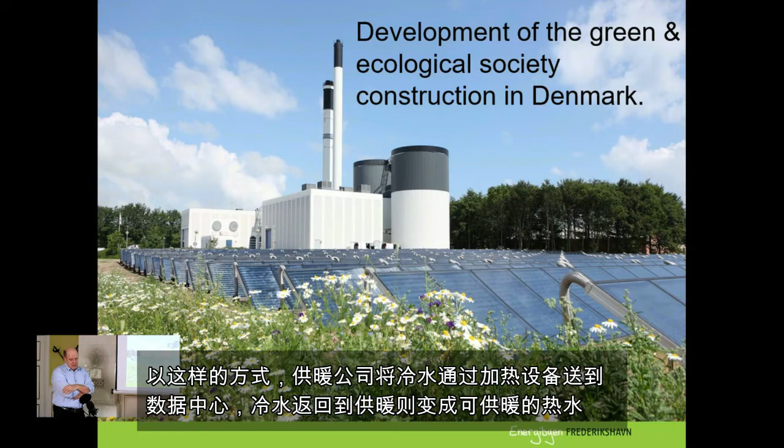Just to show you where we are actually located: we are in the northern part of Europe, also what we call Scandinavia, and in Denmark we are in the northern part of Jutland. You see our municipality from north to south, about 100 kilometers, and we have a number of inhabitants of 60,000 people. Most of them are living in single houses, and a third of them live in rural areas, while two thirds live in the towns.

Two thirds of the houses are heated by district heating, and that's very common in Denmark, to have district heating instead of single heating houses.

The Danish government has focused on two things: a medium-term and a long-term goal. One of the strategies is focusing on 2030, and that's a quite new strategy which came last year in 2019. Then we have the long-term goal of 2050, where they want to make this CO2 reduction 100%. The Danish government wants to reduce CO2 emissions by 70% by 2030.

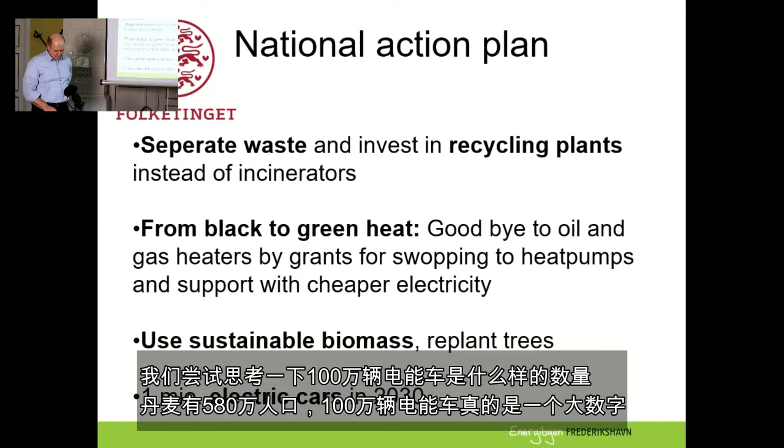Afterwards I will show you in practice what we have been doing to prevent that from happening in the future.

And of course this is a big problem for the people living here. Not economical, because they all have private insurance, so everybody living there had to move out from their houses for half a year to dry them up and restore them. The insurance was paying them, so it was not an economical catastrophe, but for the families, they were without homes for 6 months.

It was not a pleasant adventure. But today the problem is solved. The thing that is happening in our area is that there is coming more and more rain, and more heavy rain, and we have to solve that so we can get rid of the water, so that we don't have this flooding.

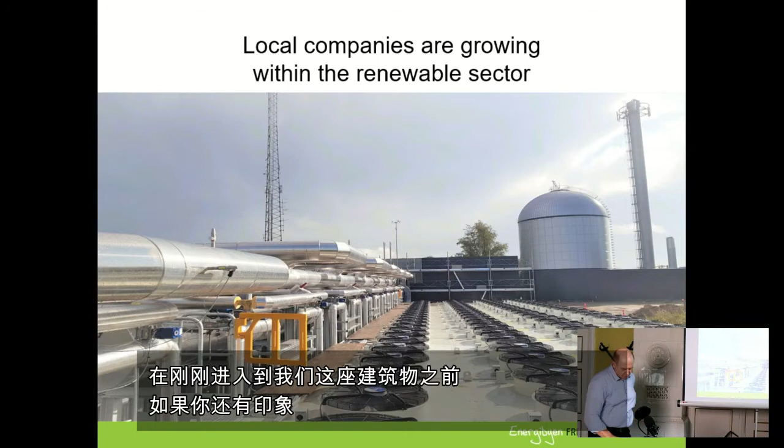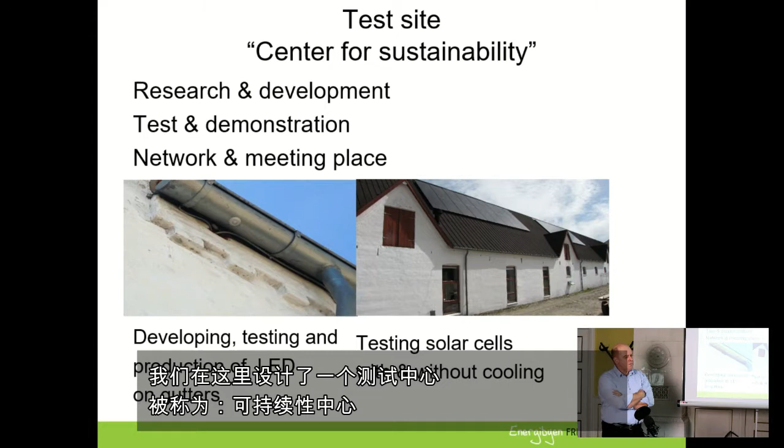At the place we are doing this movie, it's called Knivholt Hovedgård. We have a small test site, we call it Center for Sustainability, and here companies can come and do research and development, and they can do tests and demonstration, network, and meet with other companies.

These two pictures show what they are actually testing. For example, one local company is testing small LEDs on gutters, so they could light up the buildings with beautiful old architecture. Another company is testing solar cells with or without cooling. And companies are always testing smaller things here to develop new products or make their products better.

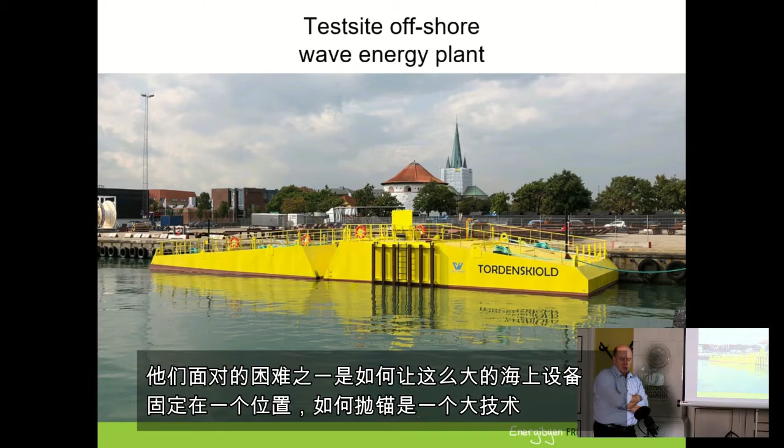This is another thing we are testing at the moment. We also have an offshore test site for wave energy plants. This wave energy plant produces electricity from the waves using two pontoons connected together - when they move, it produces electricity. At the moment it's being tested just outside, 4 kilometers outside the harbor where we are staying, and it's actually producing quite a lot of electricity. One of the efforts has been how to anchor such a plant when the wind shifts and it has to turn around, but we're getting very good results at the moment. In a way it's a very primitive machine, but when you're on the ocean you have to make simple solutions because of the strong weather.

This is another thing which is coming. In the last two years, we have been raising up a test site for offshore wind. We want to be a test site for the second generation of offshore wind turbines, and what they would like to test is different things. They want to test whether we can assemble the whole wind turbine at the harbor and then tow it out to where it's going to be placed. It would be much cheaper if you can assemble it at the harbor instead of doing it offshore.

Another thing they are testing is the size of the wind turbines. Normally a Danish wind turbine, from Siemens or Vestas for example, would be about 10 megawatts. I think in the future they will grow to 15 megawatts or so, and they have to test how we can raise structures that grow so fast and so high - I think it will be approximately 275 meters, which is much more than the normal offshore wind turbines we have today. So it's very interesting but also important to have it close to a harbor, so you can experiment with things close to land.

The way we have been making our roadmap for the future has been, until now, through a strategic energy plan. From next year we will use a climate plan instead, but it has still been our way to stay on the road - to have this energy plan, but also action plans for different things: how can we do this transformation? Every year we have done an evaluation, which we discuss with our local politicians - how is it going, and why was this going, or why was this not going?

The whole implementation, going from black to green energy in our municipality, would cost approximately 1 billion euros, and it has to be financed mainly by private investments. What we have seen is that this could create 7,000 new jobs, which is quite a lot compared to the only 60,000 people living in our municipality. So that's the main reason why we are focusing so much on the transformation - that we can create jobs for the future.

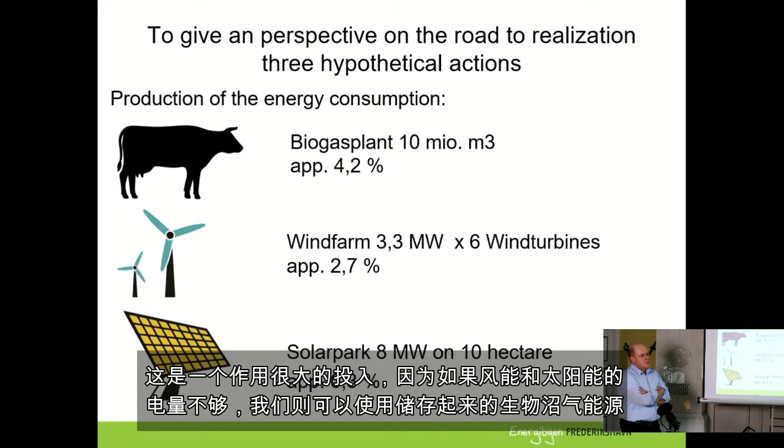And in Denmark we have a national grid with gas, and that's very good because we have storage possibilities with the natural gas, which means that if there's no electricity from wind or solar panels, then you can use the biogas from the storage in the national grid.

I will now show you an example from the district heating, how that would be working. It's working in a lot of different ways. At the moment we have a company called Man Energy Solution. They are testing engines for ships, and for many years this testing has been producing a lot of hot water when they were testing the engines, but they had to cool it down and were paying money to cool it down.

Instead, they made a partnership with the local district heating company, and that means all the heat from the testing is now going to heat up houses in the town called Frederikshavn, which we are staying in now. That's a good solution for these partnerships, to say: what is waste for one company can be positive and a good solution for another company.

The waste trucks you see there are actually driving on upgraded biogas, and that's another way. They're also burning the waste, so it produces approximately 30% of the heat in the town today by burning waste.

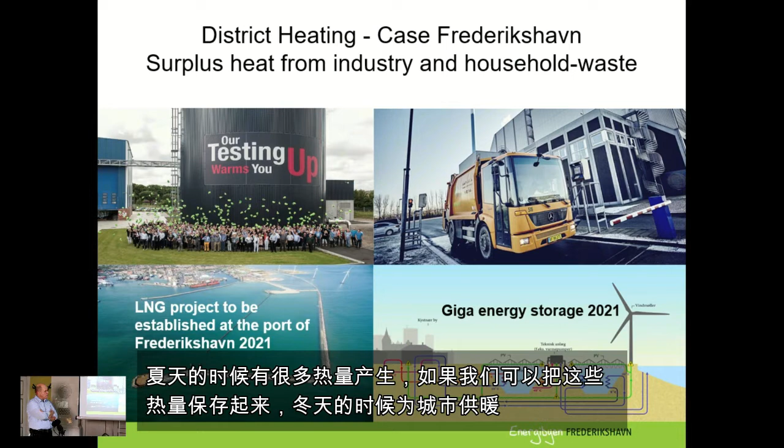And when this LNG is produced, the compression of the gas will produce a lot of heat, and that heat you can use again to heat up the town when you have the district heating company. And therefore they are also talking about how can we make a giga energy storage, because in the summertime you are not using very much heat, but if you can store it for the winter time, it could be a very nice way of nearly heating up a town like this for free.

Well, let's look at biogas and transport. The good thing about establishing a biogas plant is that we have a lot of stuff from animals that isn't used with a lot of gas, and when you have the national gas grid, you can upgrade the gas and put it into the grid. The price will be approximately 30 million euro.

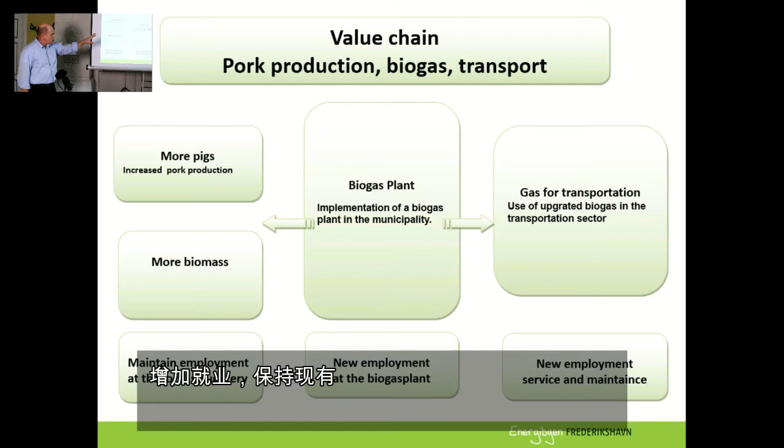And produce more biomass, and then you can maintain the employment at the local slaughtery. If there's no pigs, there's no slaughtery, and the slaughtery at the moment has 1,000 people working there. So it's important to keep these jobs too. That's the way we think when planning and thinking how to develop this municipality. It's important to think of it as a value chain, so create new jobs, keep the existing jobs, and always think about how to get more out of it.

This is what my colleague Jesper will show you. It's converting organic waste to green energy - when you are picking up household waste, you can turn it into biogas. And this company is actually also a private investment.

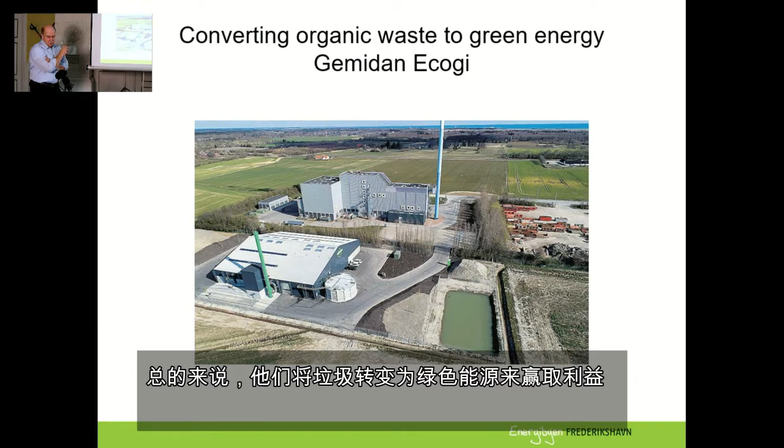Jesper will show you a short video about the company, so I won't go into it. But again, what has been waste until now is actually converted into green money.

Another example is what we have been doing with the transport sector. Some buses are driving on biogas, some waste trucks are driving on upgraded biogas, some municipal cars are driving on upgraded biogas, and also some of the city buses. I think this is also slowly making a change, but I think in the future it will not only be biogas driven cars and trucks - it will more be that private cars are mainly driven by electricity.

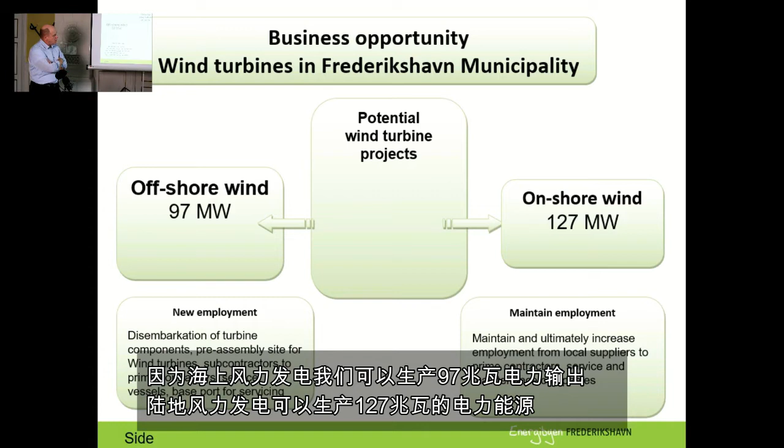When we talk about wind turbines, we have quite a lot of potential here - offshore we can produce 97 megawatt wind, and onshore 127. That's quite a lot actually. And if it was possible to put up all those wind turbines, we would have done the transformation to 100% renewable.

But at the moment, it's not very popular with the population to put up wind turbines onshore. So it's not easy to be a politician if the whole local public sector is against it. But still, it gives us a possibility to create a lot of new employment and of course also maintain the existing jobs. There's a lot of jobs in this.

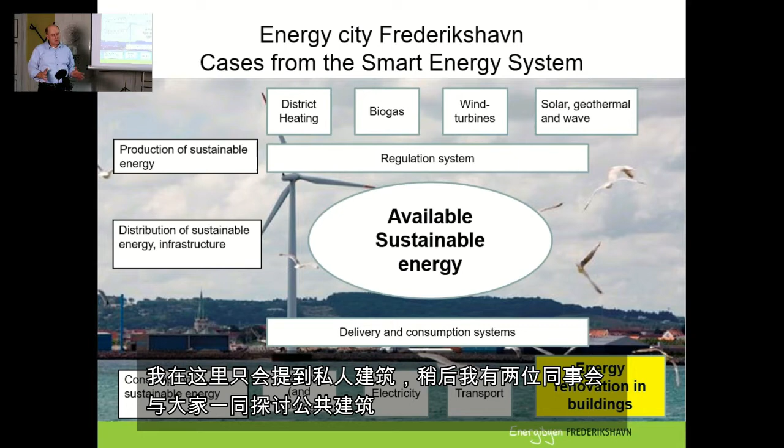A little bit about energy renovation in buildings and what we've been doing. I will mainly speak about private buildings, because my colleagues will afterwards tell you about how we work with public buildings.

Just to show you, in a few years the energy consumption of a new building has been reduced. From 2008, it was legal for a house to use 70 kilowatts per square meter per year. Now, 12 years later, it's been reduced to 17 kilowatts per square meter per year. That's quite a reduction, so new buildings aren't a problem in our area because they nearly don't use any energy.

But remember, we only put up 1% new buildings per year, so it would take a lot of years before the old buildings are swapped out or broken down.

What we try to do is motivate local citizens to do energy renovation, in different ways. We've made a magazine which says if you put insulation on your roof, you actually earn money in a few years because the temperature will rise and you won't use as much energy as normal.

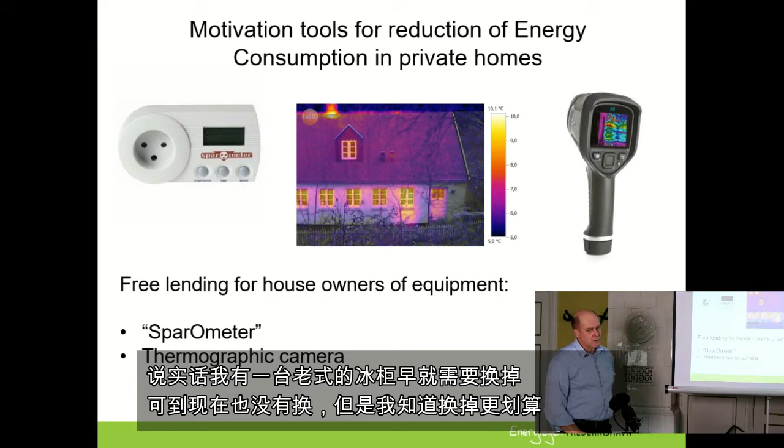Another thing we've had success with is an offer from the local energy company that people can have energy counseling for free.

This man visits house owners for one hour, and afterwards makes a report on the possibilities for the building to save money and do energy renovation. Over the last 10 years he's visited 5,000 private houses in our municipality, and remember, we only have 60,000 inhabitants. That means he's visited quite a lot of the buildings in our municipality.

The last thing I'll mention is that we try to motivate local citizens toward this green transformation. Two years ago we created the first youth climate council in Denmark. These young people are not like Greta Thunberg from Sweden, who protests against what adults have been doing wrong for years. Instead of protesting, they say: we are going to show you how you can make a change for the future that is better for the climate.

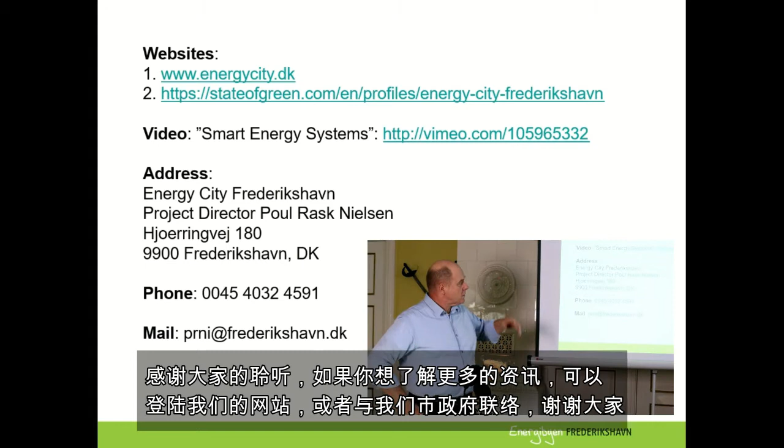My name is Jesper Christensen. My presentation deals with waste management and waste planning in Frederikshavn Municipality, with focus on how we collect and treat municipal waste from households. My background is 30 years of environmental work in Denmark, primarily in Frederikshavn Municipality and in a waste management company. Today I deal with waste management, wastewater planning and casework in relation to industry.

The purpose of this presentation is to look at the solution we have chosen in Frederikshavn Municipality regarding waste handling and municipal solid waste and municipal food waste. And finally, I will give you some thoughts about the future and new upcoming legislation.

First, I want to start the presentation with a single slide that shows why it is important to handle waste in a sustainable way. Next, I will give you a short view of the planning process in Denmark and in the municipality, followed by a presentation of the different collection systems and the various treatment plants we have in Frederikshavn. Finally, a brief presentation of possibly new initiatives in the future.

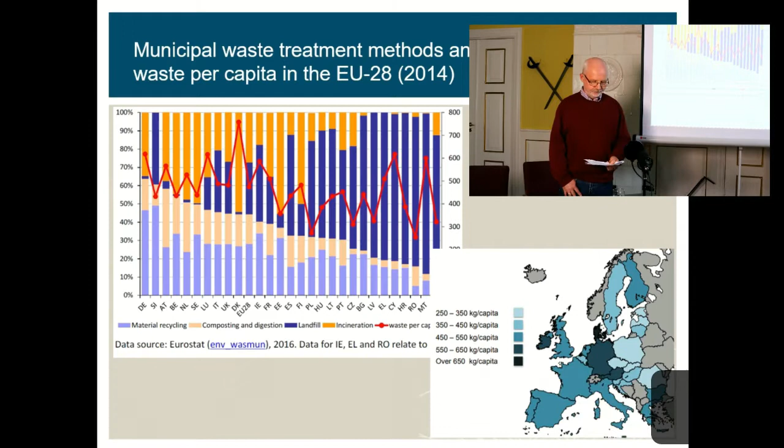In Denmark, the municipality has the responsibility to make a plan for handling waste. The plan is based on European and Danish legislation. The Danish environmental legislation states that municipalities have to prepare a waste plan which covers a period of years. In this case, we have made a plan spanning 10 years.

The plan contains and is based on 3 pillars: the mapping, where waste resources in the municipality are mapped, and a target and planning section for the upcoming years. The plan covers 60,000 tons of waste per year.

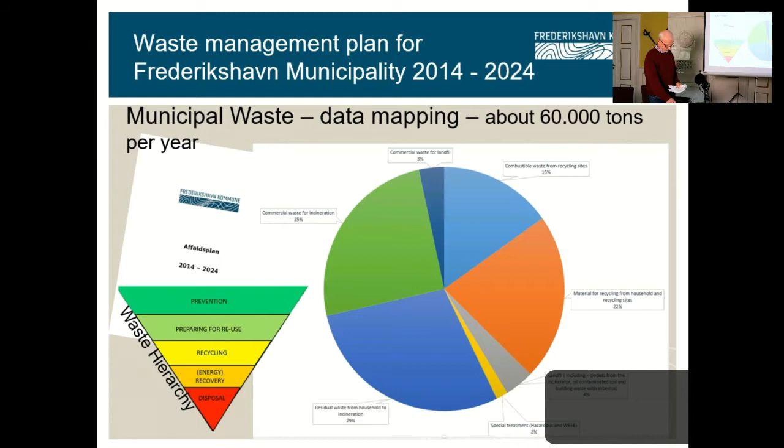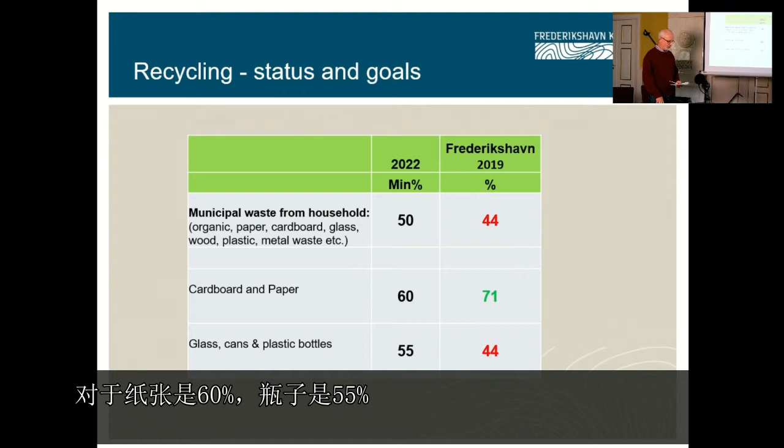That table on the slide shows the recycling percentage that Frederikshavn Municipality must achieve before 2022. It is the municipality's goal to meet the current national targets by 2022. The overall goal for recycling household waste is 50%. For paper it is 60%, and for bottles it's 55%.

The current recycling percent is only 44%, so we still have a way to go. The collection of food waste has increased the recycling rate for municipal waste in general, but we still have a gap before we meet the goal. National targets for recycling are increasing, and new legislation is in draft and is expected to come into force in 2021.

Frederikshavn Municipality handles municipal waste through the collection of domestic waste and through a number of recycling arrangements. The collected waste is treated for recycling and composting, and that means mainly garden and park waste. Food waste is pre-treated for use in a biogas plant. Residual waste that cannot be recycled goes to an incinerator plant with district heat facility, and finally we have a small amount of waste going to landfill.

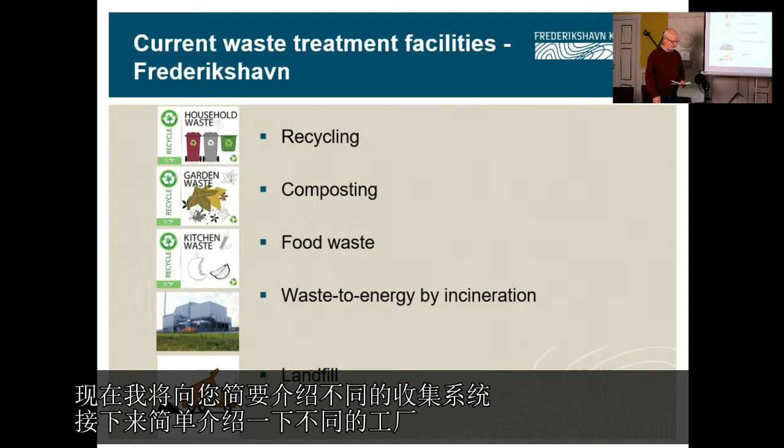I will now give you a brief overview of the different collection systems, and next a brief description of the different plants.

We have here a picture of the collection system we use today. Every family living in villas, townhouses or country houses must sort waste in a number of fractions in containers provided by the municipality. Apartment houses have a system similar to the self-delivery system with some extra containers.

First of all, household waste from the kitchen should be divided into two fractions: residual waste and food waste. Food waste contains energy and minerals, especially phosphor, a limited resource important to get back onto farmland. Second, every house has a container for paper for recycling, and finally discharged batteries for separate treatment as hazardous waste.

As previously mentioned, national targets for recycling are increasing, and we expect new guidelines coming into force in 2021. One of the proposed changes is increased collection by the household with up to 10 different recycling fractions. We are considering future options, but are still waiting for the final legislation.

Frederikshavn Municipality has established a number of centrally located collection containers which citizens can use for the disposal of glass bottles, plastic bottles and metal cans. They collected around 450 tons of paper and cardboard in containers. Together with paper and cardboard from the household collection system, it gives a collected volume of about 2,200 tons in 2017. The amount has been slightly declining in the last year due to less printed advertisement and newspapers and more use of electronic media.

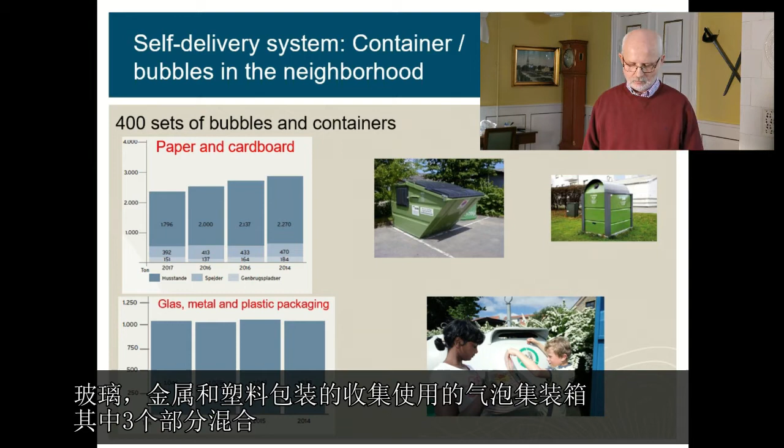The collection of glass, metal and plastic packaging takes place in bubbles where the three fractions are mixed. Analysis of the content of the bubbles has shown that people have a high ability to sort correctly when it comes to glass. Unfortunately, the collected amount of plastic and metal packaging is very limited in the arrangement, something we will focus on in the upcoming future and in upcoming new legislation.

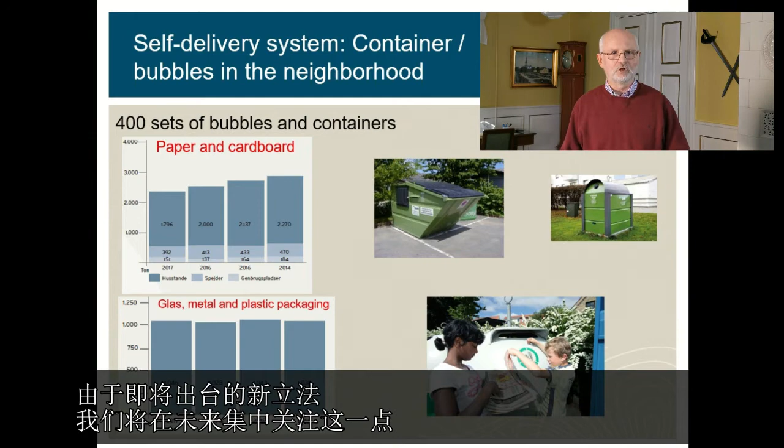The larger sites with expanded opening hours can provide greater options to separate the waste into several different waste fractions. Around 35,000 tons of waste is collected through the municipality recycling arrangement. The total volume has been stable in recent years with variations in the different fractions. The 4 largest sites collect 75% of the total volume.

One of the challenges in the last year has been to ensure the purity of incoming construction waste, so that the material does not contain problematic fractions such as electric components, PCB, heavy metal from paint, etc. Something to focus on in the future. More collection by the household due to new legislation can mean closing down the smallest recycling sites, but nothing is yet decided.

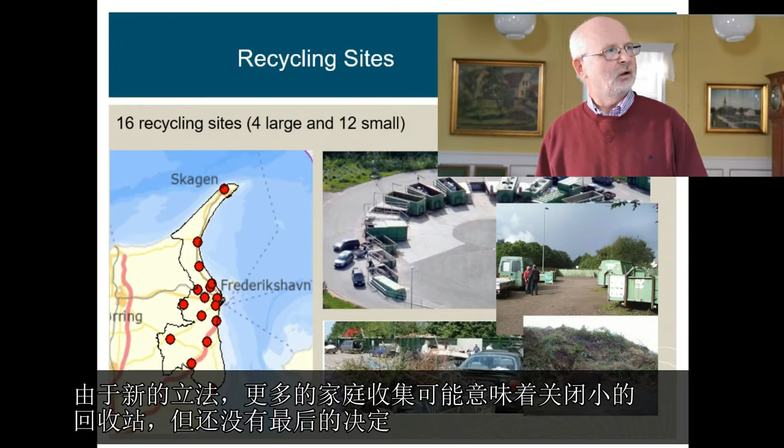There is one operating landfill in Frederikshavn. The plant was established 7 years ago. In 2009, the plant received approval to expand, and the expansion has a capacity of approximately 70,000 tons of mixed waste.

The previous existing area of the landfill is closed down, as you can see on the picture. A part of the closed area is used for recycling of construction waste, cinder from incineration and garden waste, oil-contaminated soil, building waste with asbestos and other fractions for special treatment. One of the biggest recycling facilities is also located on the site, as you can see.

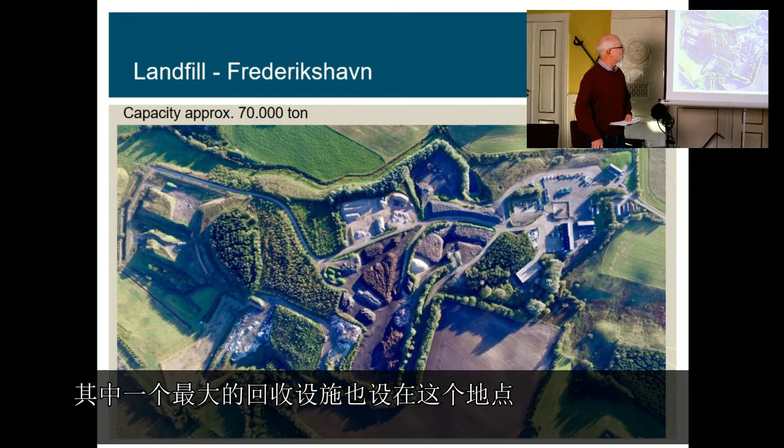Residual waste for burning from households is treated at the incinerator located in Frederikshavn. Residual waste from the recycling site is also treated at the incineration plant, as well as industrial and commercial waste. A total of approximately 35,000 tons of waste is incinerated at the plant per year.

More recycling means less waste for incineration, and a consequence could be that the plant has to be closed down. A national committee is working on a mapping of the total combustion capacity in Denmark. The result of the work may also mean that our plant in Frederikshavn will have to close during a period of the next 10 years.

In April 2019, Gemidan, a private company, opened a new plant for pre-treatment of organic waste in Frederikshavn. The plant is located next to the incineration plant, as you can see in the picture. Frederikshavn Municipality has made a contract with the company to handle food waste, a deal other municipalities in the area have also made.

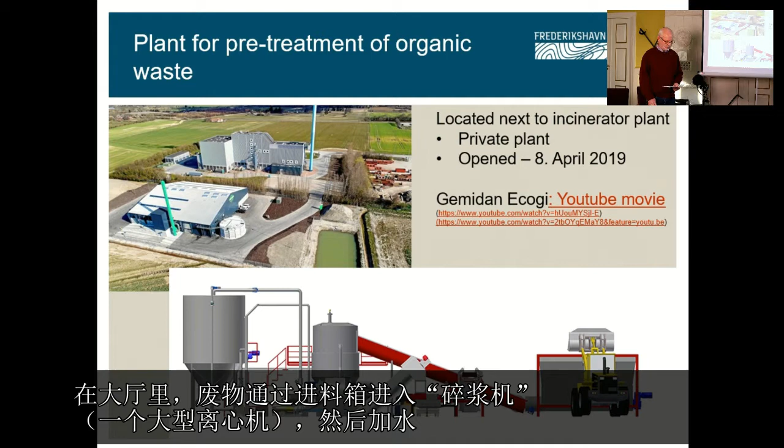The process: when the garbage truck has delivered the residual waste at the incinerating plant, it continues to the pre-treatment plant. In the hall, the waste comes through a feeder box into the pulper, a large centrifuge, and water is added in the process. Gemidan mainly uses water collected from the roof and roadways, as you can see beside the plant.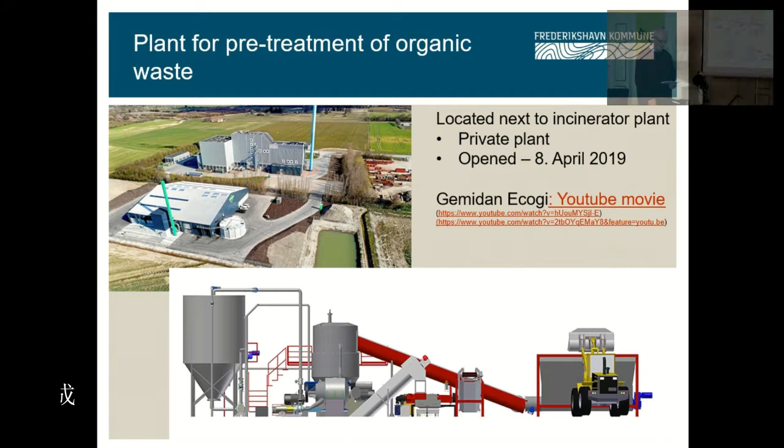During the pulping, the organic material is dissolved in the water fraction as a paste of biopulp. After the pulping process, the biopulp must be separated from plastic and other foreign elements, which happens by passing the pulp through a separator. The finished pulp is stored in a big tank, and plastic and foreign elements are sent to the incinerator.

We will now see a video of how the whole process works in the plant.

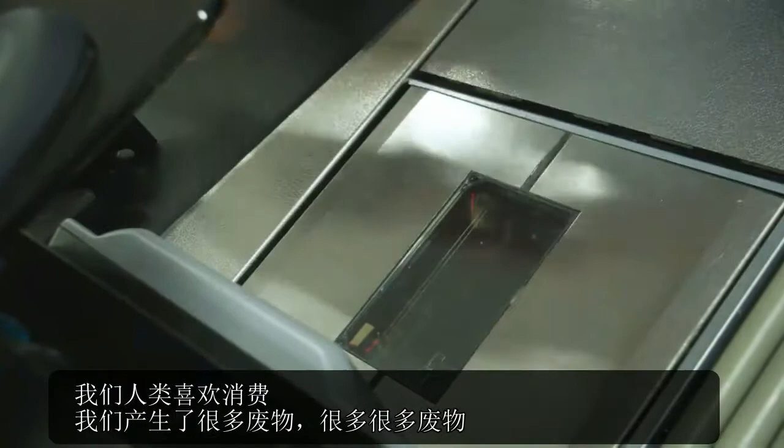We humans love to consume, and we generate lots of waste—lots and lots of waste. In fact, each one of us discards about half a kilo of waste in the dustbin every single day. This adds up to more than 200 kilos of waste a year.

The climate is changing all over the world. Temperatures are rising because the emission of greenhouse gases generated by human consumption of oil, coal and gas is out of control. But imagine if we could change this, if we could make better use of organic waste in the future by using it to fuel vehicles, for instance. Or if we could use banana peels, coffee grounds and other foods thrown into the dustbin to fertilize farmland instead of just incinerating all this waste.

This is by no means a futuristic scenario. In fact, it's already happening.

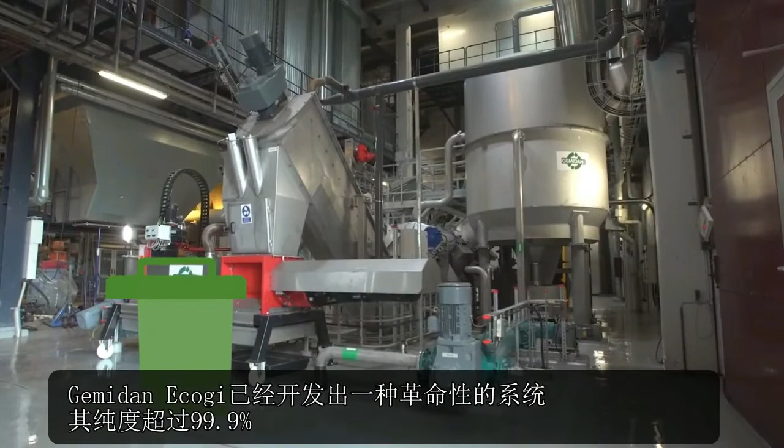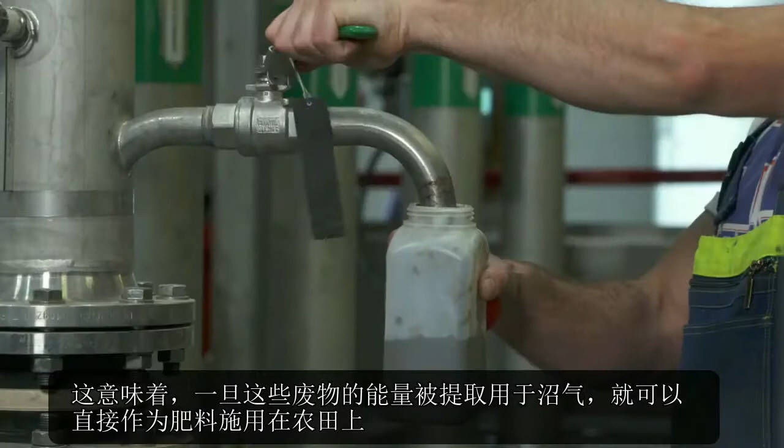Gemidan Ecogi has developed a revolutionary system which yields a unique purity of more than 99.9%. This means the waste can be applied directly as fertilizer on farmland once its energy has been extracted for biogas. This is how the Ecogi system exploits more than 95% of the easily accessible organic material contained in the waste. Not only that, it costs less than traditional waste management systems.

We are constantly working to make both the system and the technology even more efficient and sustainable. This is the circular economy at its best.

By making a small joint effort, we can exploit and reuse waste far better than we do today. To achieve this, however, it's important that you sort your waste, which is actually quite easy. All you have to do is sort it into two categories: organic and inorganic material.

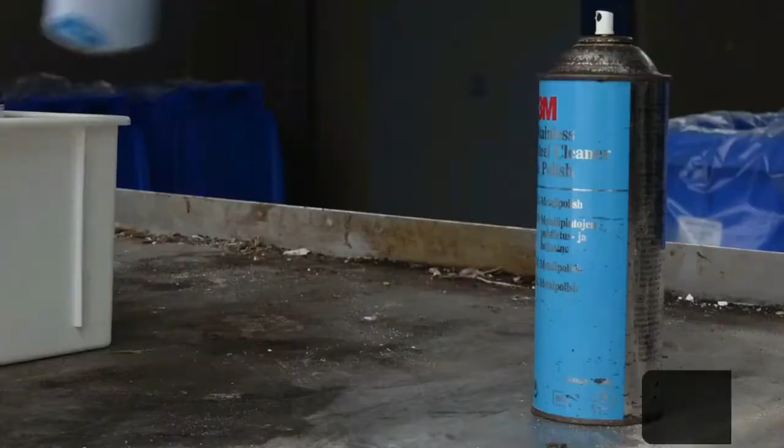The organic material, which is recyclable, is whatever is edible by humans and animals. It's also okay to throw out packaged foods along with the organic waste. Chemicals and medicine cannot be reused, and you must deposit them at your recycling station as you usually do. Textiles and nappies aren't organic materials either, which is why they must be discarded as residual waste in the dustbin.

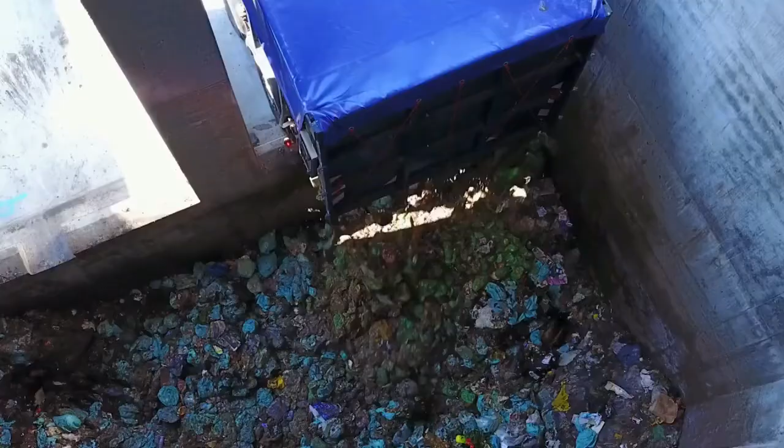When the waste arrives at Gemidan Ecogi's system, it's fed into a large rotating centrifuge known as a pulper. The pulper mixes the waste with water, quickly breaking down all the components into a mash-like substance called biopulp. From here, the biopulp is sent to a separator, which removes the inorganic material and sends an organic mass at a degree of purity above 99.9% to a biogas facility.

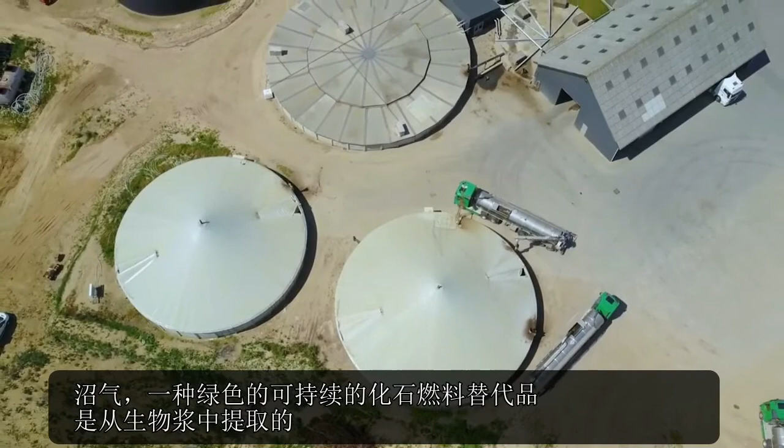Biogas, a green sustainable alternative to fossil fuels, is extracted from the biopulp. The degassed residual product from the Ecogi system, which is used as biofertilizer on farmland, is up to 10 times purer than required by law.

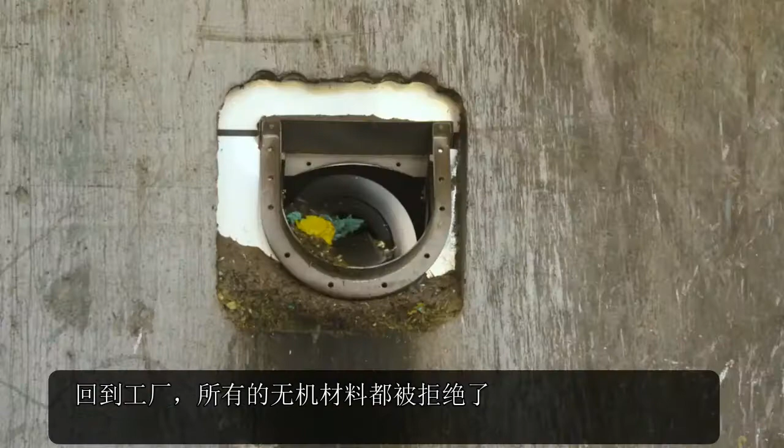Back at the facility, all the inorganic materials have been rejected, and the dry matter is recycled wherever possible or sent to incineration, which converts your waste and mine into district heating, benefiting all of us.

Help us to be kind to our environment. It's simply common sense, and green at that.

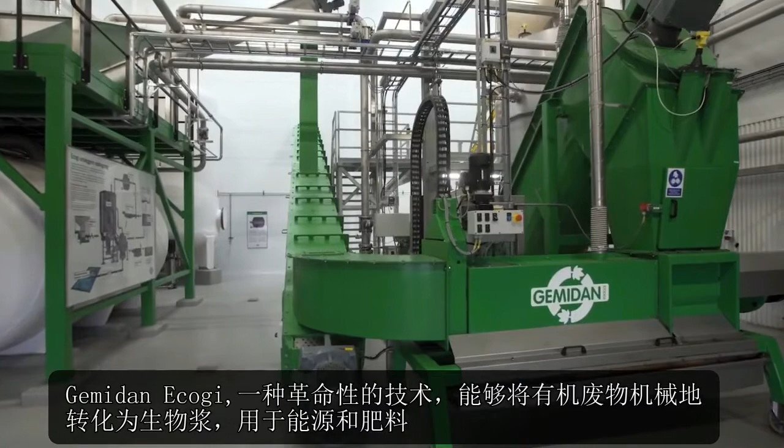Gemidan Ecogi is a revolutionary technology capable of mechanically converting organic waste into a biopulp that can be used for energy and fertilizer. The system is designed to efficiently receive, process and get rid of organic waste.

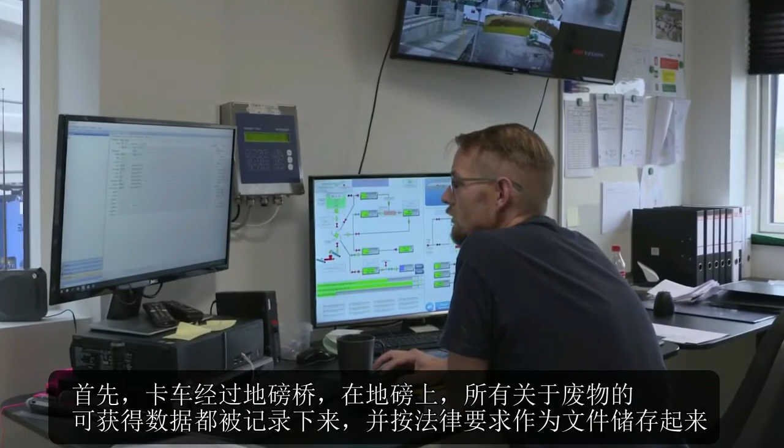First, the lorries cross the weighbridge, where all accessible data about the waste are recorded and stored as documentation as required by law. The system is designed to be able to efficiently handle all types of lorries.

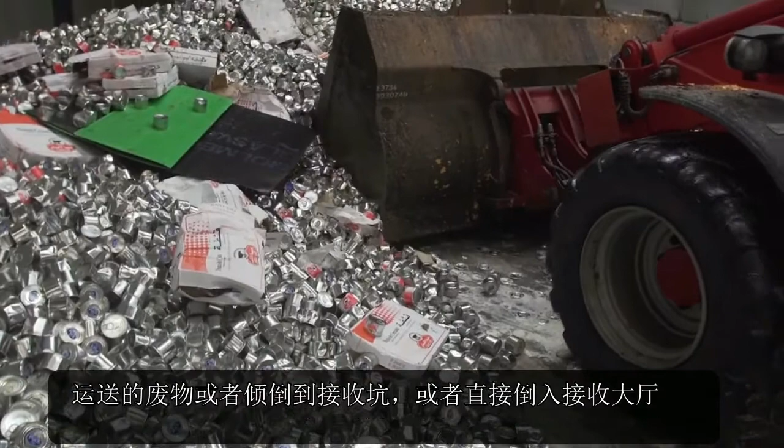The delivered waste is either tipped into the receiving pit or directly into the receiving hall. The system and the technology are designed to be able to handle waste enclosed in all types of packaging: plastic, metal, glass, and cardboard.

After this, the process of processing the packaged organic waste begins. The waste is loaded into a feed hopper by a front-end loader. In this system, the feed hopper is capable of operating for about 4 hours, but it can be adapted as required.

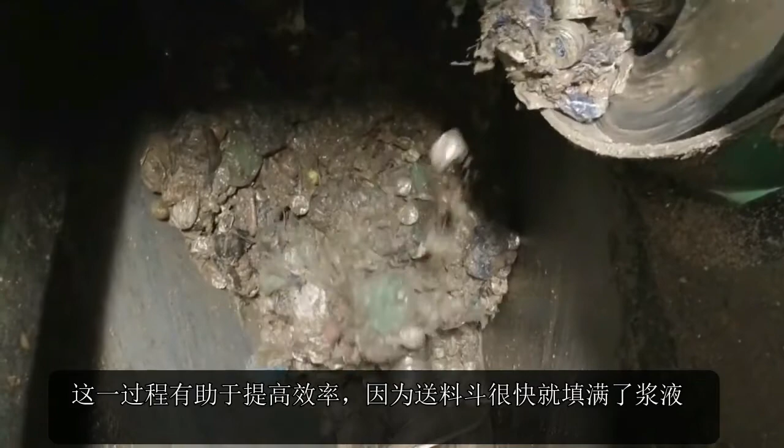Once the feed hopper is filled, the automatic process begins, in which the packaged organic waste is conveyed up into a small feed hopper by a screw conveyor. This process helps enhance the efficiency because the feed hopper fills the pulper very quickly.

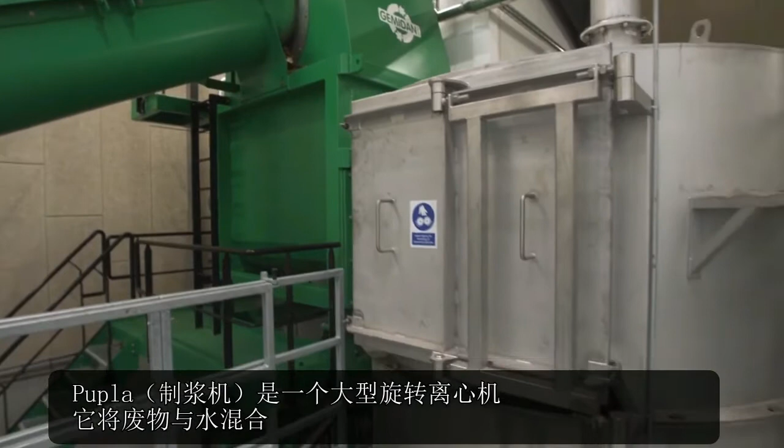The pulper is a large rotating centrifuge in which waste is mixed with water, quickly dissolving the mixture into a mash-like substance called biopulp. From here, the biopulp is sent to a separator, which separates the inorganic material from the organic material, to send a more than 99.9% pure organic pulp to a storage tank and onto tankers destined for biogas plants.

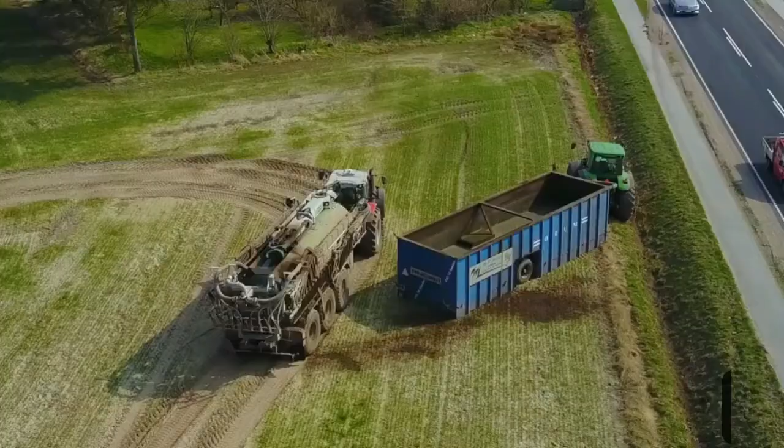The plants extract the biogas from the biopulp as an eco-friendly, sustainable alternative to fossil fuels. The degassed residual product from the Ecogi system is spread as biofertilizer on farmland, thereby contributing to the circular economy.

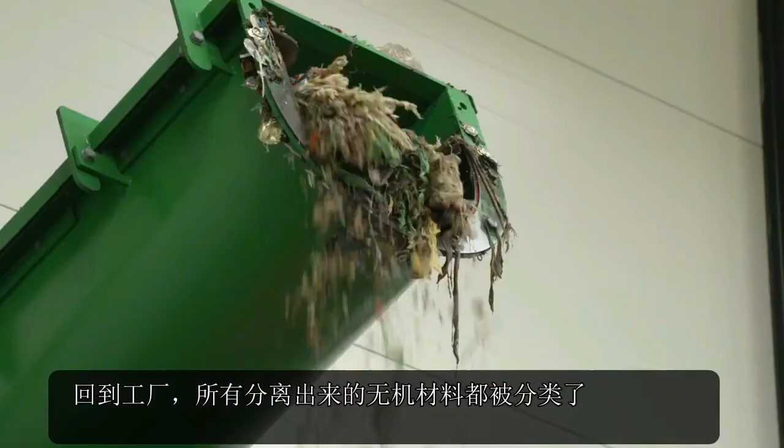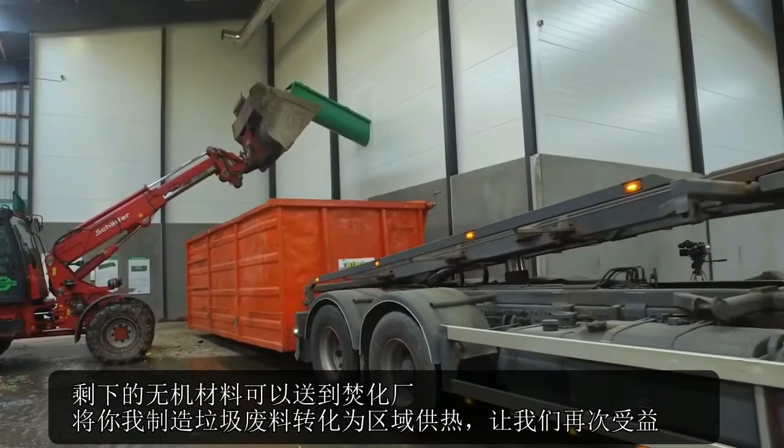Back at the facility, all the separated inorganic materials have been sorted out. The dry materials are recycled wherever possible. The inorganic material left over can be sent to an incineration plant which converts your waste and mine into district heating, benefiting all of us once more.

Help us to be kind to our environment. It's simply common sense, and green at that.

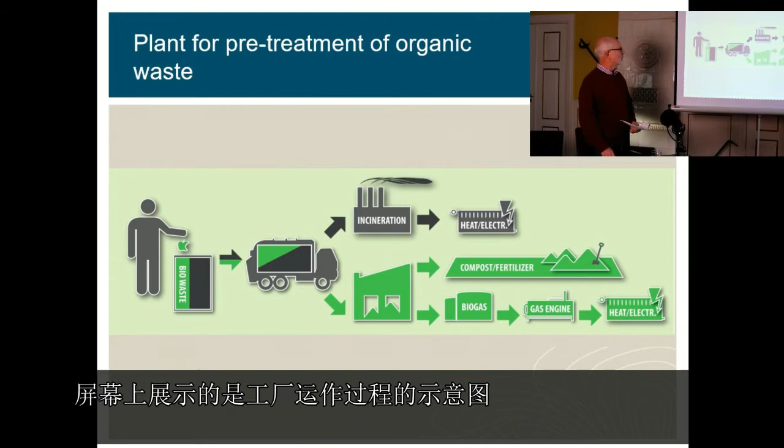And here you have a schematic of how the process is going on in the plant.

I'll now give you something about the initiatives in the future. Frederikshavn Municipality has a number of recycling arrangements in which, as mentioned earlier, some have a potential for improvement. It is obvious to optimize the existing system for collection of glass, metal and plastic packaging.

As mentioned earlier, the waste from household is separated into food waste, residual waste, paper and batteries. A future scenario could be adding an extra dry mixed fraction to the home collection system. This will be in line with the upcoming legislation that is suggesting collection of up to 10 different recycling fractions per household.

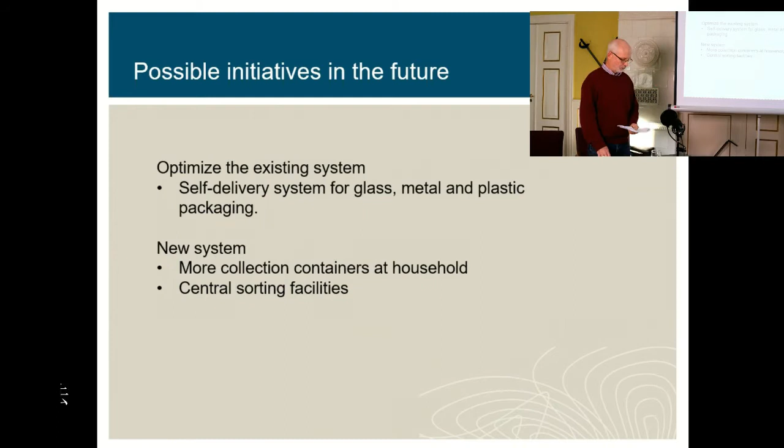We are considering future options, but are still waiting for the final legislation. But something will happen in this area during 2021.

The mixed fraction could be glass, metal, plastic collected for delivery to a central sorting facility. The central sorting facility could manage the separation by technical solution into recycling fraction and waste for incineration and energy recovery. Central sorting plants are not typical in Denmark, but Aalborg Municipality has a plant with capacity also to treat waste from Frederikshavn.

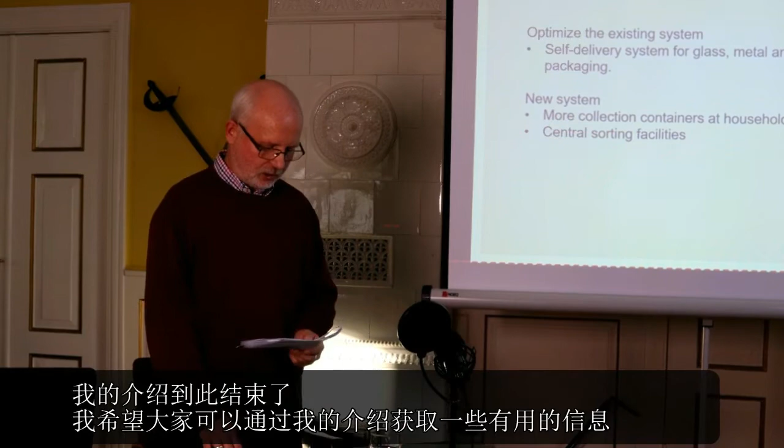But as I say, nothing has yet been decided what we will do in the future. This was my final word, and I hope you can use some of the information. Thank you very much.

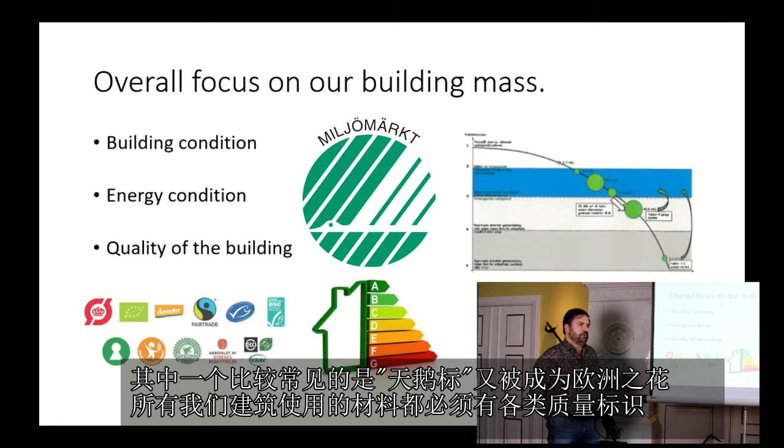So we are focusing a lot on when we are going to modernize a kindergarten, which demands there are for a new building and the new way to use the buildings. In Denmark we have a lot of different labels of quality that we can focus on, and one of them is the Swan mark, or the European Flower, which tells a bit about the quality of the materials we are using when renovating or building new buildings or new projects.

So can you give some examples on how you look at the quality of the building? What would that be in practice?

Some of the focus points today include the indoor climate. 50 years ago here in Denmark we didn't focus on the indoor climate—it was a different time. We were not as much indoors as outdoors at that time. That can also be seen today as we use more square meters per person in the rooms, the way that we are using our indoor areas.

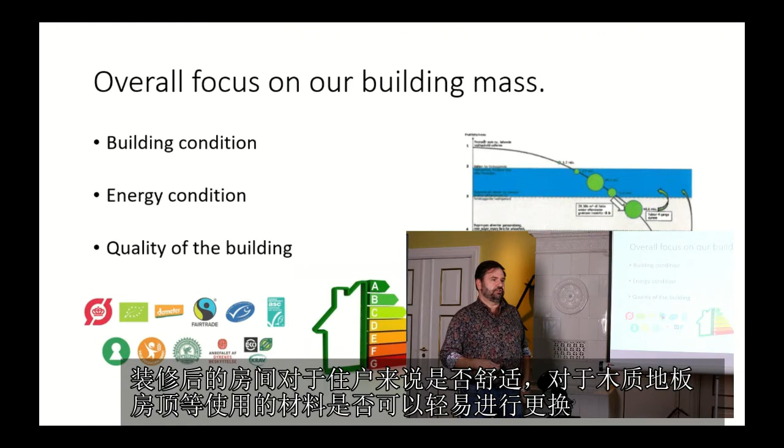But it's also a kind of how is the degassing of the materials when we have finished the project. Is the room nice to be in? Are there some materials that we are using for the woods or the ceilings, and how easy is it to renew the materials? In Denmark we have different labels that tell us and give us a guarantee that it's eco-friendly and so on.

Right now we are having a project where we are trying to focus on a holistic perspective, and instead of only focusing on the quality of the projects that we are making, we also are focusing a lot on the materials that we are using. So we are focusing on how much CO2 is bound in the production of the materials.

We are focusing on LCC, life cycle costs, and LCA, making a life cycle analysis. What's a life cycle analysis? We are focusing on the projects and the way we are making our projects - is it good for the indoor environment, or is it bad?

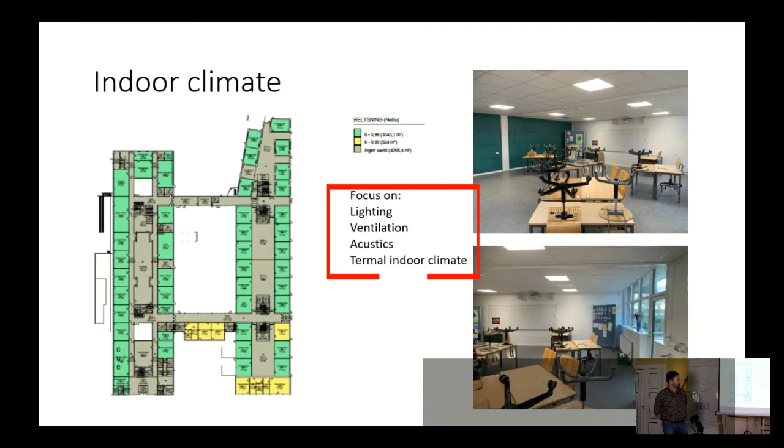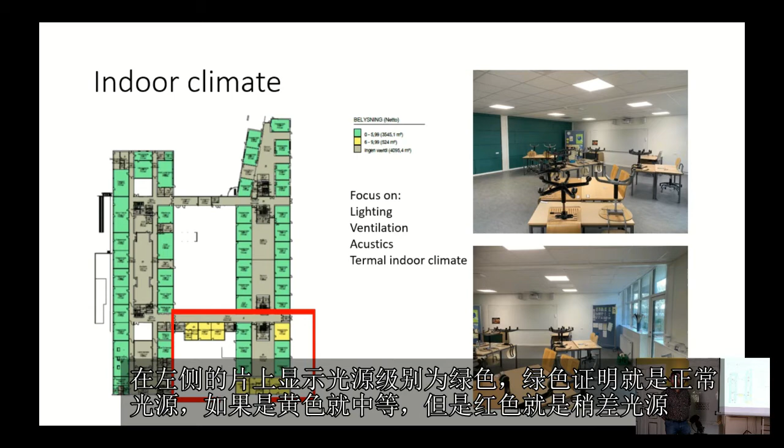As you can see in the picture, when we screened the building, the lighting was okay. It shows overall green. When it's shown as yellow, it's medium, and if we had registered it as a red area, it was a bit poor or bad on the score for the lighting.

That's a way to show, as an example to the politicians, some issues that could be good to focus on, and make a plan for how, when we're going to renovate this school, to do the right investments and smart investments to make good quality for the building while also focusing on energy.

To tell a little more about the projects, I will give the word to my colleague.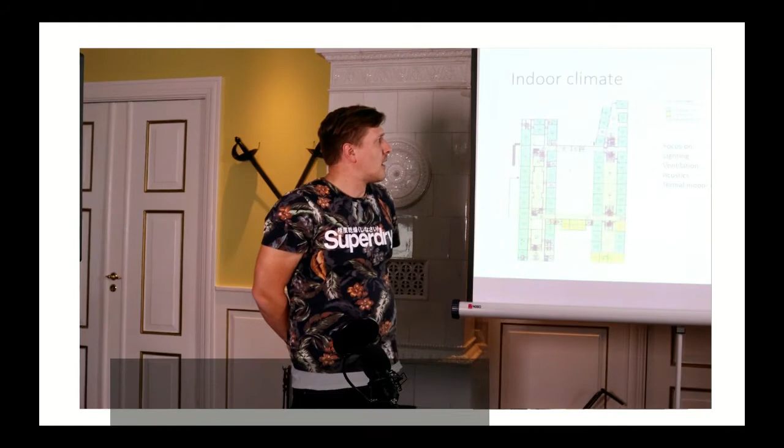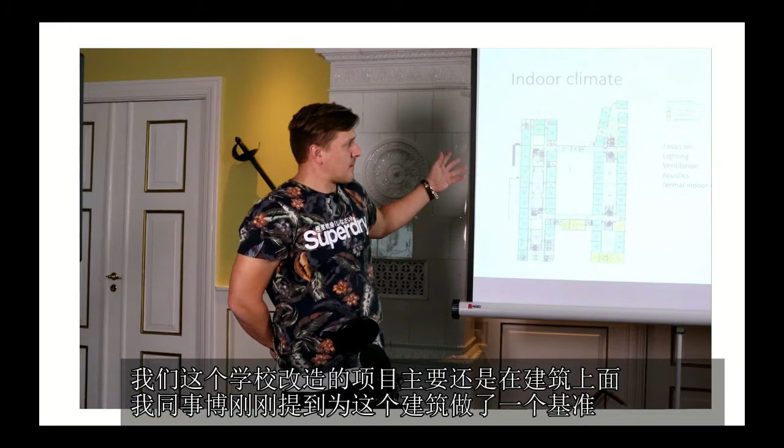Johannes, and I'm working as a project leader, mostly on building projects. In this case, as Bo was talking about, he had made a benchmark for this building and set up some pinpoints we want to work with.

In this case, we were talking about lighting. As we work, we pinpoint some quality things about the building, and because we have worked with energy and buildings for so many years, the energy consumption for the building, and also for the products, is normally standard.

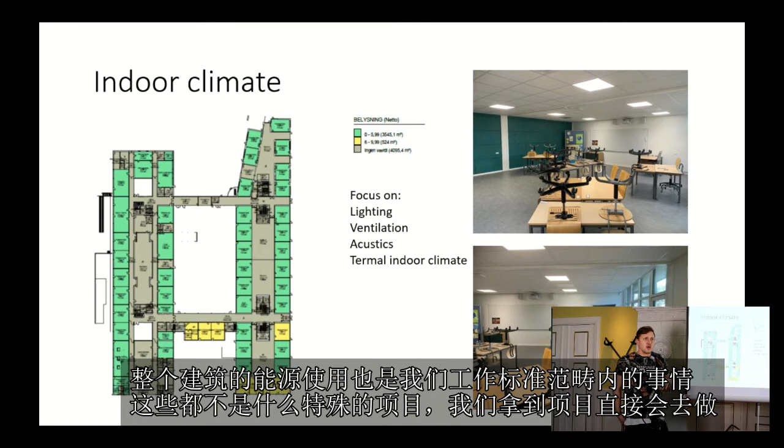So when we look at this project, the lighting system is standard for us to work with, and the energy use for the whole building is standard. It's just something we do. We benchmark a lot of our buildings, and we do a lot of smaller projects where we lift something in a building.

In this case, we work with ventilation for a school, and we use some energy on the installation. Years ago we were working with a project like this mostly for the money, but now we are working for the good project. In the good project there is low energy use for the equipment, but also a good climate in the building. So it's law that we need to work with good projects in climate, in energy, in the whole building.

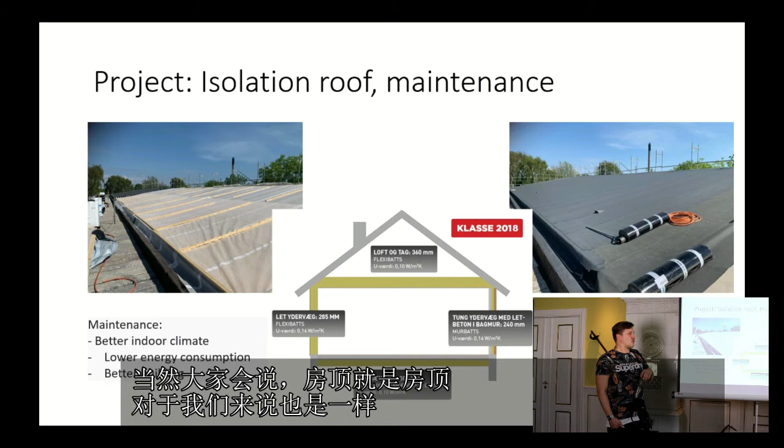Another case is a roof. We have a lot of old buildings, and we do a lot of maintenance on them. In this case, we are doing normal maintenance work with a new roof, but because of our regulations and laws, we have a very high level of insulation on every roof we work with. So you can say a roof is a roof, but for us it's just a roof we are working with.

But in that project there will always be work with the material, as Bo was talking about, and we also as standard look at how much energy the whole building will use when we are finished, and that's law in Denmark. So for us it's a normal day at work.

Johannes, can you tell me what are the typical problems with old buildings? What are the 5 or 4 main points you look at when attacking an old building?

Economy. It's easy to build a new building when we have a regulation where the law says how you must build a building, so it's easy here where we are living. The different thing is when we have an old building with old materials, old practices of building, and a different use of the building. The old buildings are the difference, and we have 1% new buildings per working year, and the rest is old buildings.

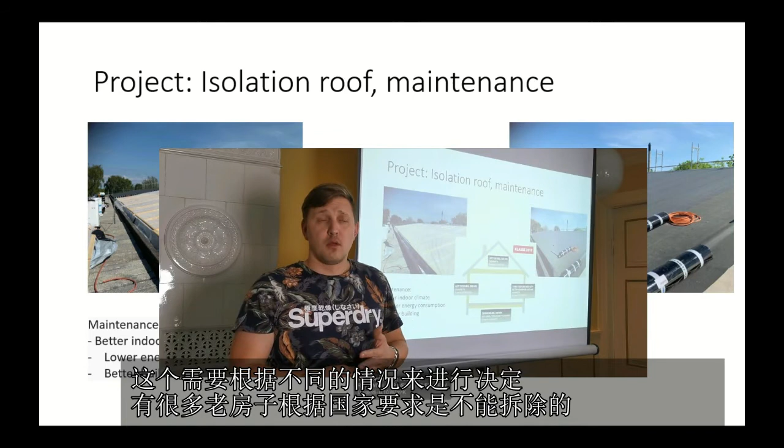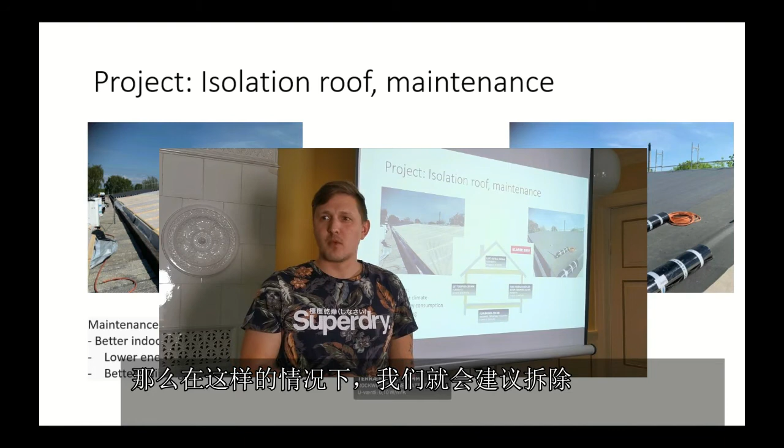It can be different cases, because in some places we have other rules for buildings we cannot remove. Then we need to do something. Sometimes it's very expensive to work with that case, but that's a little problem. The biggest problem is our building mass has a lot of buildings from the 1600s, 1700s, 1800s, and those buildings are built as a system, and if the system is bad, it could be an example - materials that are pollutants or something like that, and sometimes we say that building is too bad. Remove it.

If you look at a new building, can you tell us about the slide you have there? What is typical in the roof? What is typical in the walls, windows, and the insulation? Can you go through the building and say what are the regulations or the demands today?

We have the law text about how much insulation we need to have in our building, and that's based on an energy benchmark for how much a whole building can use. A Danish company made this model - if you are using their product, you will have a picture like this, and in most new buildings, but also in old buildings we are working with, we're using that model. That means we have 300 millimeters insulation in the floor, almost 400 to 500 millimeters in the roof, and the walls have 200-300 millimeter insulation on the sides in a normal building.

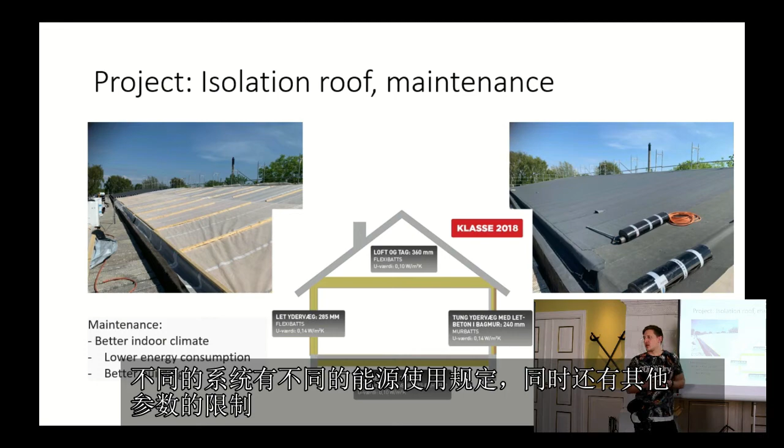But then we are also working a lot with our technical systems - our pump systems, our pipe systems, our lighting systems - and there are different rules for what they use in energy, but also a lot of other parameters.

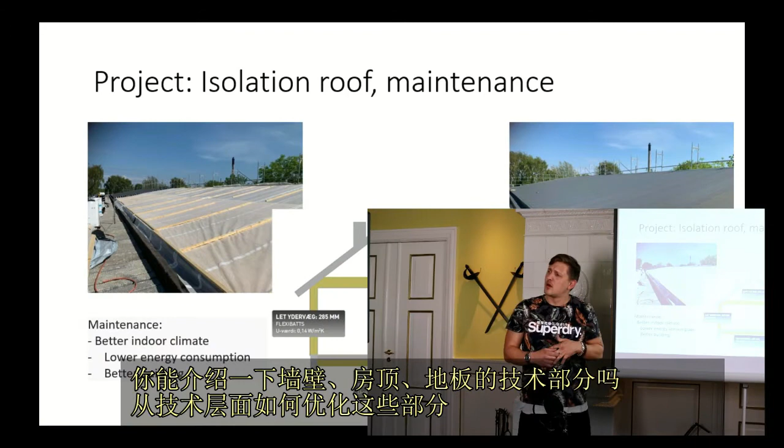Can you say a little bit more about the difference between the walls, the roof, the floor, and the technical side? What are you looking mostly at today? Is it the technical side to optimize, or is it the walls and the ceiling and so on? It's the whole thing.

We were looking at building stuff like a roof or a pump 10 years ago. Today we are looking at the whole building, as Bo told about. It's also about the quality inside the building. So for us, it's quite normal looking at a project and saying what can we do here, and where is our money best used. And then in the next case it can be a quite different project with other works going on.

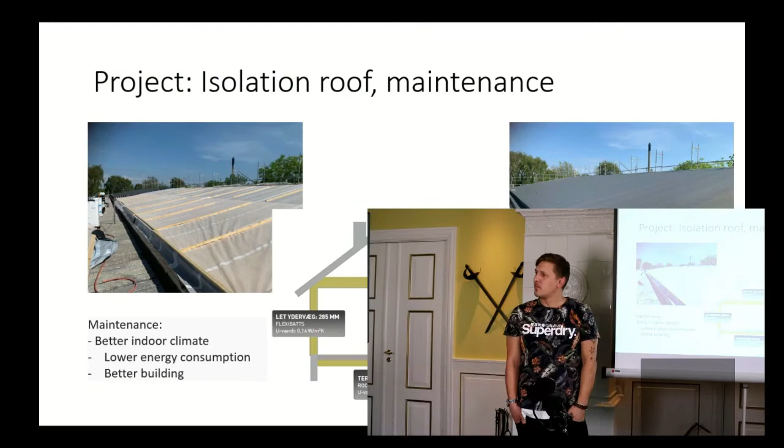What about the materials? For many years we have been using bricks and insulation in Denmark - but what do you think will be in the future? Will that be the same, bricks and insulation?

A lot of buildings are built with materials that can work for 100 years, 200 years, but the energy consumption especially has shown us that isn't smart. The use of the building isn't the same for 200 years. So I think we are going in a way where we are using materials for a building, but for 50 years, and then we change the focus to how can we recycle and build something new from the same materials.

So you think recycling will be a part of it? Yeah, actually a building is built from some materials, and right now we will use wood here and stone here and stuff like that. When someone is looking at that material bank in 50, 60 years, maybe they will use the wood in other places where it's smarter. I think the mindset will be recycling material, and it's formed for a building today - in the future it will be another case.

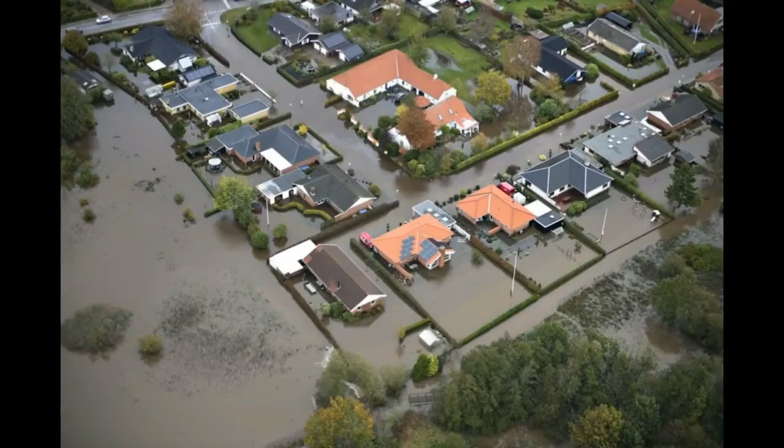To prevent things like what happened four years ago, the municipality said we have to do something, and they did two things. First, they built dams in front of the village, so that if the water is rising, it can take up some meters here. Second, they dug a big hole to pump over water when there's too much coming, and when it reaches a certain level, the pump starts pumping over water, and when the water level falls again, they can open it so it can flow out into the sea.

They started building with this, and afterwards they built the big hole to collect water when there was too much in the river. I hope you've enjoyed the day from the municipality in Frederikshavn. You heard about how we work, and what we think will happen in the future. What's for sure is that if we don't do anything, climate change will go very, very badly. But I hope you have the impression that you can do something, and we are actually looking very positive for the future, because we think we can handle climate change all over the world if we have the right approach. Thank you.